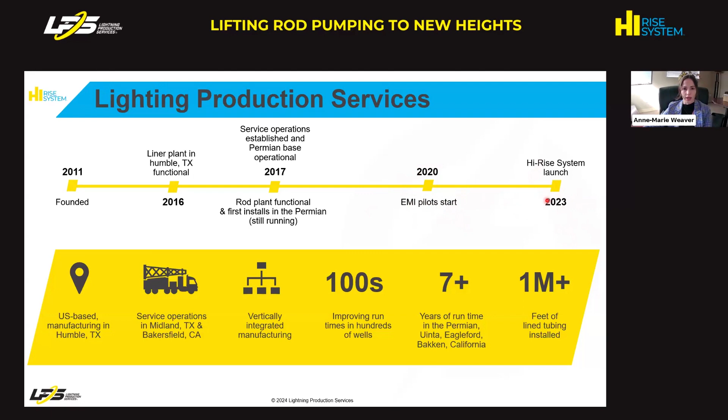All right, so jumping into the presentation. So we know that the traditional approach is positioning your pump in the vertical section, and you have that advantage of not pumping through that significant deviation. Although with these horizontal wells and the shallow kickoff points, you are still usually pumping through some pretty significant deviation up top. But when it's no longer economical to lift these wells from above kickoff point, you may want to lower your rod pump into the curve or to the lateral portion of the well to reduce the producing bottom hole pressure on the reservoir and therefore increase that drawdown.

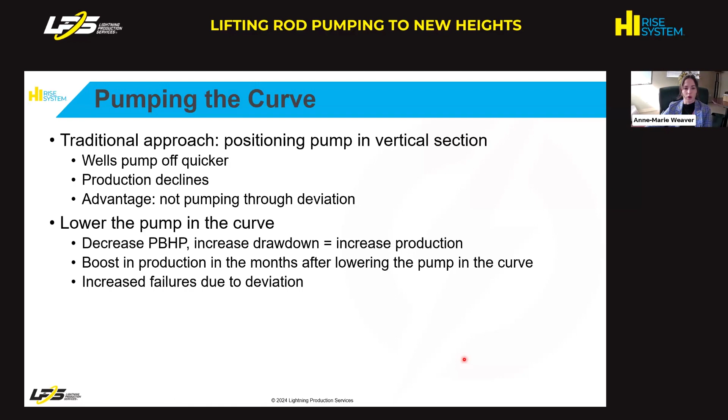So by increasing your drawdown, you're able to increase your production, but a lot of the times you'll see those increased failure rates due to pumping through that significant deviation. So there's several solutions that operators may try and implement to help reduce these increased failure rates. So operators look to install guides beneath kickoff point, specialty types of tubing, continuous rod is an option as well. And then obviously thermoplastic liners, which we're going to be discussing today. So today we'll be focusing on thermoplastic liner, which was what this operator used. But again, we're going to be comparing it to rod guides because they also had 19 wells on rod guides as well.

So if you've never run lined tubing in any of your wellbores and you're not familiar with it, it's essentially a thermoplastic liner that we extrude into the shape of a pipe profile, and we mechanically bond it to the tubing string. So what this means is when we get a load of tubing in at our manufacturing facility, we'll actually measure the ID of the tubing string, and we'll extrude the liner to a bigger OD than the ID of the tubing. And then we'll mechanically roll that liner down and stuff it into the pipe. So you have an extremely tight fit. So that's what we mean when we do say that we're vertically integrated. It's one of the advantages that we do have.

We offer various resins to match your downhole wellbore conditions, so I'll discuss that in detail in the next slide. And another advantage of lined tubing is we can bond it to new tubing, but we can also bond it to used yellow or blue band tubing, which is really beneficial to a lot of our operators the last couple of years when steel prices for tubing were extremely high.

So some of the benefits of lined tubing: it prevents that rod on tubing contact, eliminating steel on steel wear. And so you'll have increased run times on your tubing string as well as your rod string. It protects your tubing from corrosive reservoir fluids and eliminates the need for rod guides. So you do not want to run guides through the lined tubing section.

And it does have a lower coefficient of friction than bare steel or steel on steel, as well as guides. And so that reduces your loading at surface as well as on the rod string. And I'll discuss that in more detail in a couple of slides.

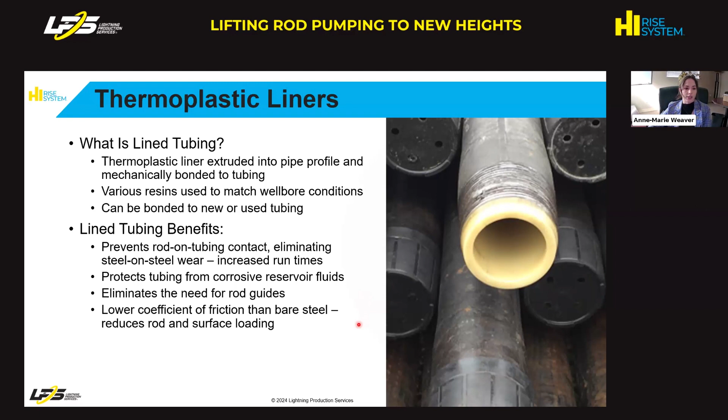LF60 and LF99 are amorphous resins, whereas LF115, LF115B, and LF170 are crystalline resins, and they are a bit more dense than these amorphous resins, and so they're able to handle wear better. And so in the case of pumping the curve, I lean towards recommending a crystalline resin due to the severity of the deviation and the often high resulting side loads, because they're going to wear at a slower rate than the amorphous resins.

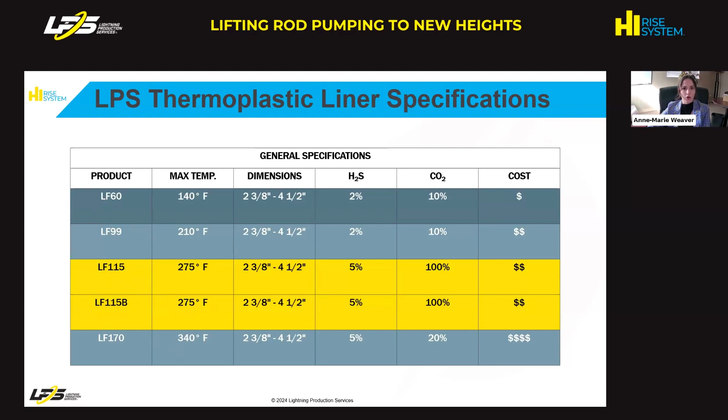One thing I just wanted to point out, LF115B is our cold weather LF115. So we're now in the Bakken, and basically the process of how it's bonded to the tubing is a little bit different than the LF115. So if you have any questions on that, we can get into that further post-webinar.

So what we did is we took a well from the case study, well number 1, which you'll see more data from in a few slides. And we just chose a point beneath kickoff point to calculate the normal force. So you need the length of the rod. In this particular calculation, we're just looking at one 25-foot stick rod section. And you need the weight of the rod. So in all 39 of the wells, they ran 7/8 conventional stick rod beneath kickoff point through the curve. Again, 19 with guides and 20 with liner.

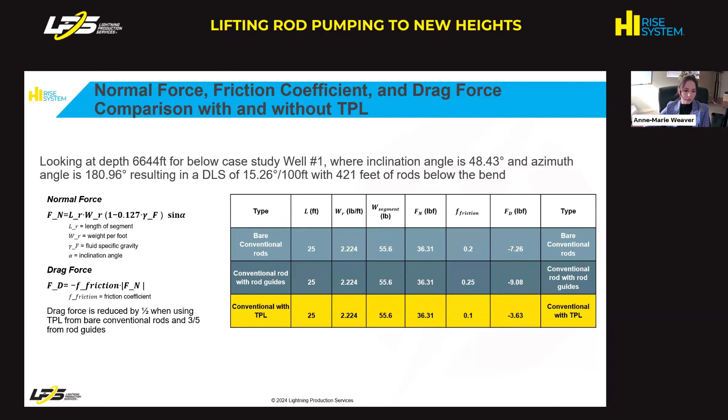And one thing I did want to mention is we ran the entire wellbore with guides and with liner. In reality, you'd only do it where it's absolutely necessary. And you'll see in the case, they only ran liner and guides beneath kickoff point. But you can see that obviously the lower coefficient of friction, the more liner you run, the more benefits you have.

So you have a much lower gearbox loading when comparing to steel on steel, as well as rod guides, as well as a much lower peak polish rod load, electricity costs. Your rod loading decreases, so you'll have increased fatigue life on your rod string. Your side load is substantially reduced because it's calculated based on your peak polish rod load. So with that, having a much lower peak polish rod load, your side load is less.

And then your downhole stroke is considerably increased due to the less friction. And so you're able to produce more.

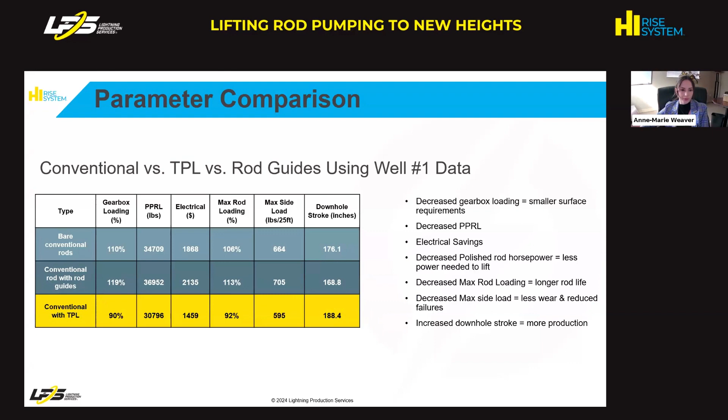So, okay, now jumping into the case study, I wanted to give you a little background on the area that the subject wells are located in. It's in the West Edmond-Hunton Lime Unit, just northwest of Oklahoma City, and was originally drilled in the 1940s. The operator that we worked with took over operations in 2018. And the previous operator that they took it over from began drilling horizontals in 2005, and they have over 80 horizontal wells drilled to date.

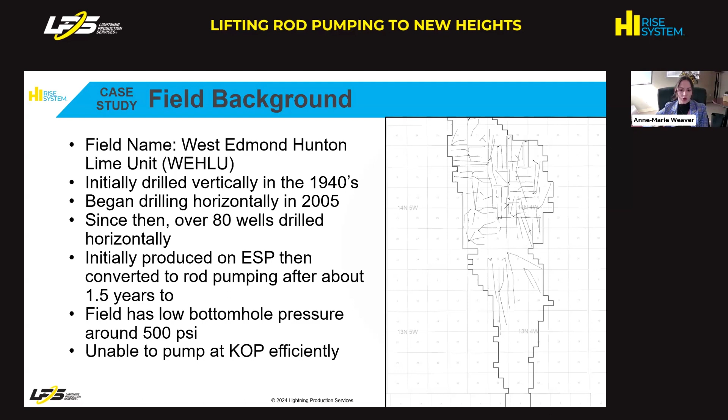The field is known to have a very low bottom hole pressure due to the continued drawdown over the last 8 decades. And so the initial bottom hole pressure is below 500 PSI, making it almost impossible to artificially lift these wells above kickoff point. So new wells are artificially lifted with an ESP below the curve, usually between 75 to 90 degrees inclination, and then converted to rod pump as the fluid rates decline.

So as mentioned on the last slide, due to the low bottom hole pressure, 200-foot tangents were drilled anywhere from 75 to 90 degree inclination in order for them to successfully run their ESPs. As production drops below 200 barrels of fluid per day, or if they were experiencing numerous ESP failures, that's when they would convert their wells from ESP over to rod pump.

And as you can imagine, the friction from the rods through the curve made it really difficult for them to pump efficiently. So after modeling different rod designs and many field trials between guides and thermoplastic liners, they determined that installing thermoplastic liners beneath kickoff point and through the curve was the most efficient method for them to pump the curve.

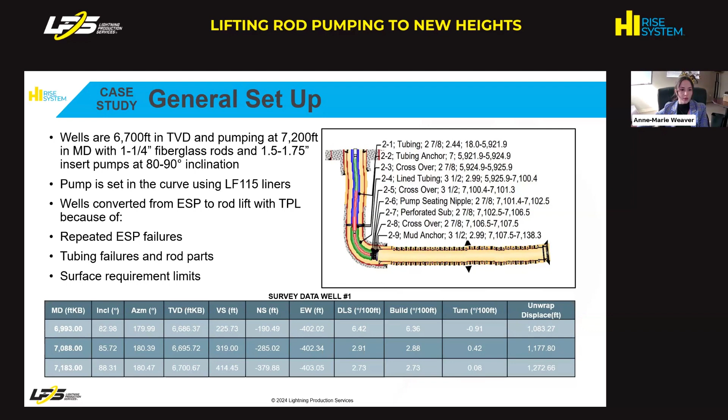Okay, so jumping into some of the well data, they had 3 different wells that I'm going to show you to be converted from ESP to rod pump, where they modeled rod designs using RodStar as the predictive model with both thermoplastic liners and rod guides through the curve. We then did follow up on this particular well. They had an actual downhole card to determine how close the predictive model was to their actual loads in the field. So shown in the table here, you can see quite a bit of difference comparing the 2 cases.

One thing we really want to point out is we're modeling an 18.5-inch difference in downhole stroke length, a 16% decrease in gearbox loading, a 5% decrease in peak polish rod load, and a 12% increase in minimum polish rod load. So you have a better minimum polish rod load to peak polish rod load ratio, which has been proven to help increase your run times.

And one issue that we caught when running through the different models, RodStar estimated almost the exact same production, even though we were running the same pump and the same strokes per minute, but you had a considerably longer downhole stroke. So we went ahead and calculated it ourselves using this equation from the sucker rod pumping manual textbook. And we got a pretty substantial difference in production when comparing liner to rod guides. So around 290 barrels of fluid per day and 330.

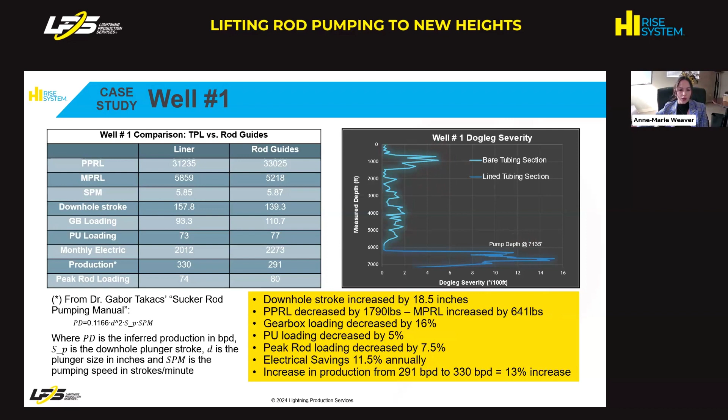So here's the actual pump card after converting the well over to rod pump with thermoplastic liners. So the actual results are almost spot on to what the operator was modeling in terms of peak polish rod load. And one other thing that I wanted to mention, they didn't have a well that had both thermoplastic liners and rod guides through the curve.

So they didn't have a well that had guides, pulled it out, and then installed lined tubing. It would be something that they're planning to do in the future, but they don't have any comparison that has had both in the exact same well.

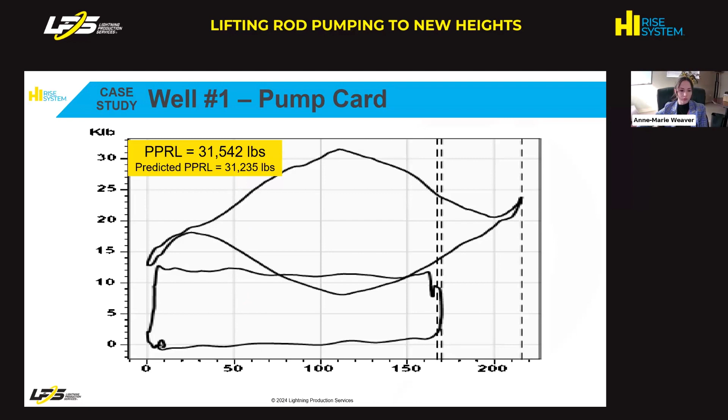So as mentioned, for this particular operator, a good rule of thumb out in this field was to convert around 200 barrels of fluid per day to rod pump, but sometimes it was necessary for them to convert earlier if they were experiencing numerous ESP failures, as they did for this well.

So converting this well over to rod pump with thermoplastic liners drastically reduced their failure rate. Obviously they were having multiple ESP failures, and they did lose a little bit of production, but they were able to increase their runtime by almost double by not having to constantly work the well over.

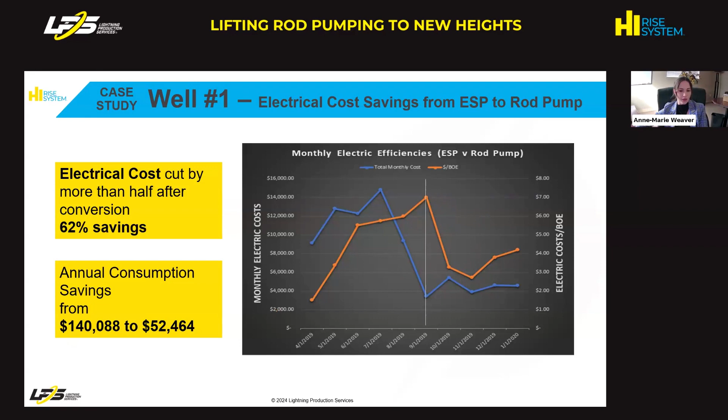Again, it would be good if they had the same power usage for rod guides through the curve in the same well to see what it does to cost having to pull a higher load, since it would be a substantially higher load with that significant of deviation. And it's something that they plan to do in the future.

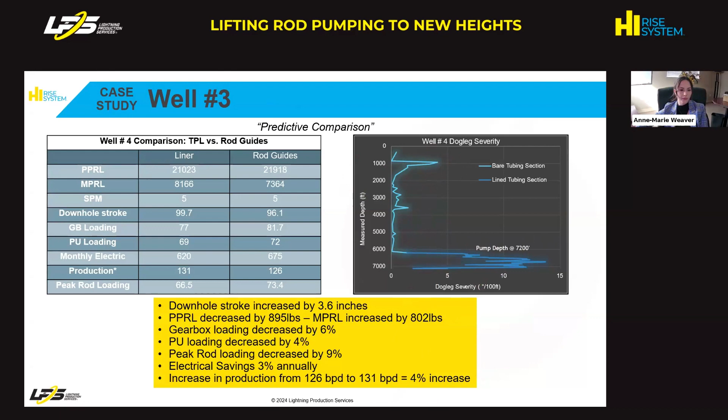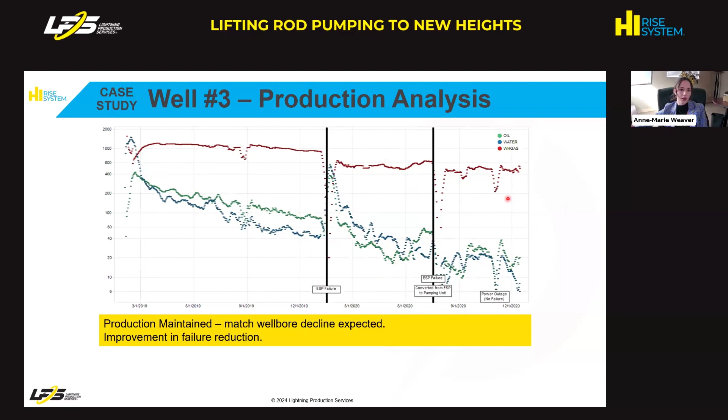So on this well, they didn't experience as many ESP failures as the first two wells before conversion. But since the fluid production was lower than their 200 barrels of fluid per day, they went ahead and converted the well over to hopefully get ahead of those potential failures. And after conversion to rod pump, production was maintained back on the decline curve.

And one thing that I wanted to mention is, so they had 7-inch casing. So they were running 3.5-inch lined tubing, typically with a 1.5 to 1.75 pump, just depending on how much fluid they were making. But in a couple wells, they were actually able to directly offset this liner cost because due to significant deviation, they were running mainly all steel strings,

but they were able to use a 640 unit instead of a 912, the engineer said, on a couple wells due to the lower coefficient of friction with the lined tubing. And so they were able to directly offset this liner cost by purchasing a smaller pumping unit.

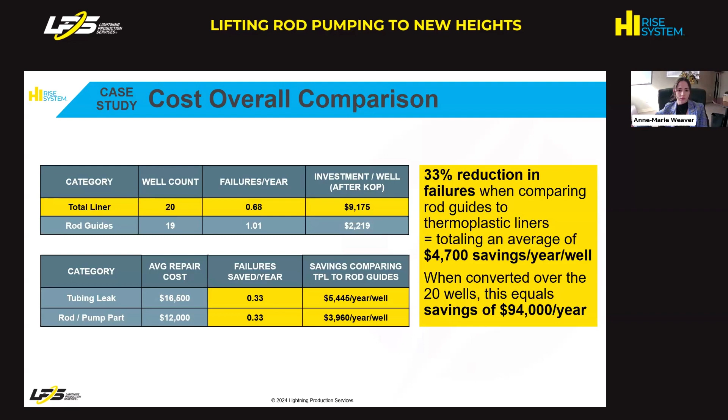So just wrapping up the presentation today. They were able to maximize their drawdown and therefore increase production on their wells, while also decreasing their failure rates by installing thermoplastic liners versus rod guides. And by using thermoplastic liners, they were able to reduce some of their system loading and actually purchase smaller pumping units, as well as increase the life of the equipment.